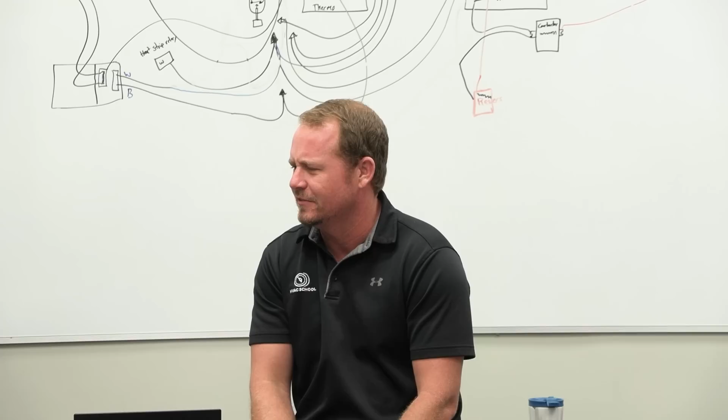Brazing. The number one thing that I see newer techs or newer installers who are really bad at brazing do is they just don't apply enough heat. So they don't get in with enough heat, and so then it takes way too long. So if you imagine the two things that can cause damage to components are brazing too long or burning things that you didn't intend to burn, getting heat places that you didn't intend to get it.

So that's both surfaces that may be behind the brazing area, wires, all that kind of thing, but then also heat that's conducted into valves. And so the way you protect that is, if you're near a surface, you use a heat shield, like a piece of snap lock metal duct, bent out, cut it, keep a piece about that big in your truck. It's just a nice thing to have.

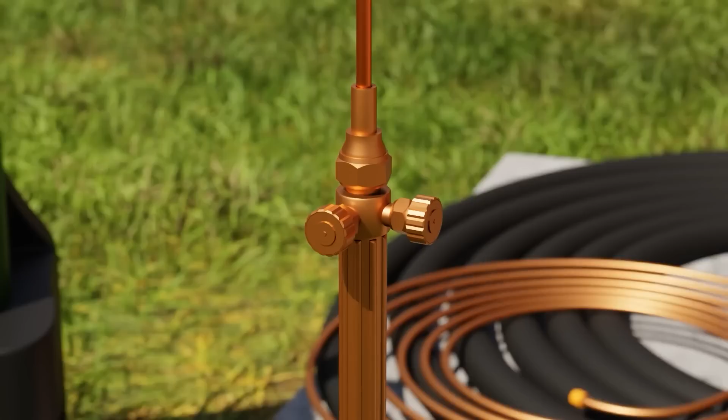Or you can use one of those Solder Weld heat shields, or you can use the big heat shield drop cloths that we have. But you need to have some sort of heat shielding, and that's to protect things that are behind the work area. Anybody here use air-acetylene, the turbo torch? Anybody? Man, I wish we would use that more, because I really think for newer folks who are learning to braze, it's the bee's knees.

And that is a technical term. Literally, the knee of a bee. I don't know why that makes me laugh. Just imagining a bee with knees. Anyway, this is not going well so far.

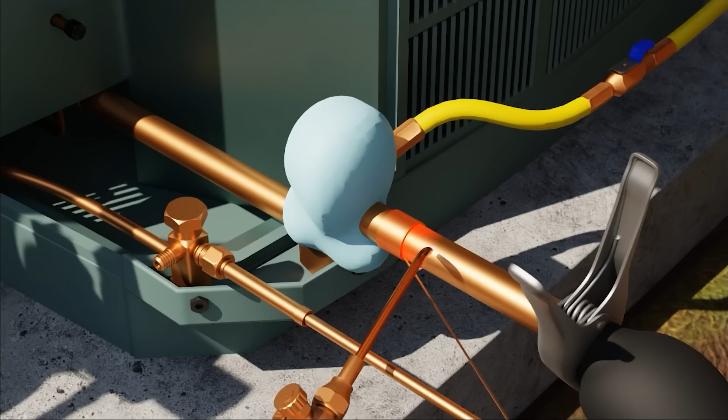So air-acetylene is really nice to learn on, but the downside to air-acetylene is that it does have more of a convective flame, which means that it pushes heat out further. It's not actually as hot at the flame, but it produces more heat behind the flame. So if you do ever use a turbo torch, really nice and easy to use. It's got a nice big flame, so it heats a little bit more evenly.

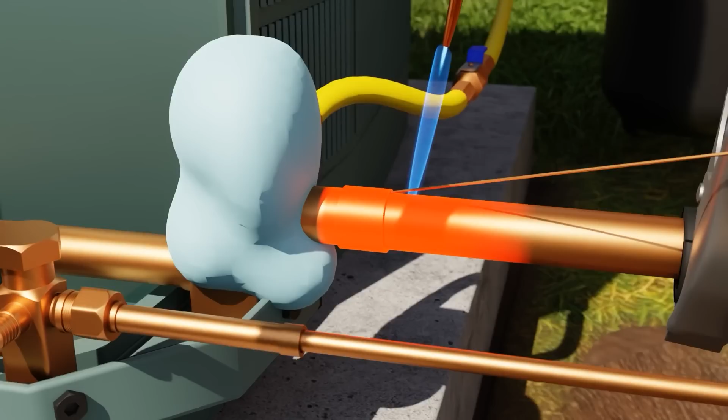Point being that in order to braze it in, you want to get the entire fitting to dark cherry red, not bright red, because then you're about to make a hole in it, but just deep cherry red. You move your heat in and out and all around until you can get most of the fitting deep cherry red, and then you apply your solder, and you do that as quickly as possible. But then you also need to protect the heat sensitive components.

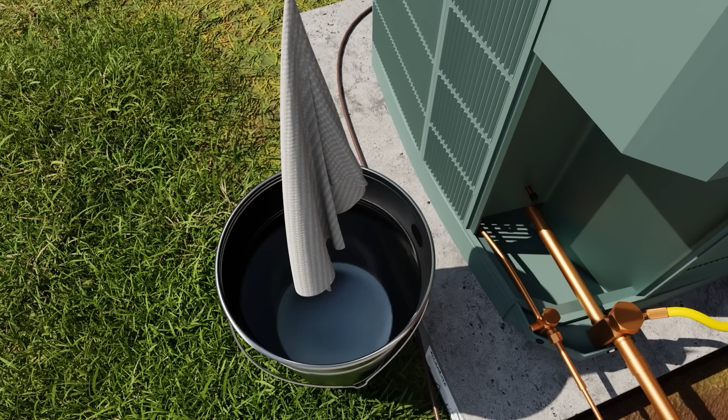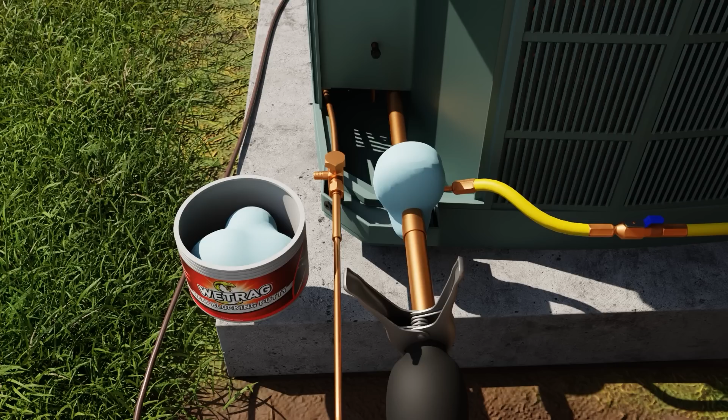You can use a wet rag, or a set of wet rags, or wet toilet paper, or wet paper towel, or whatever you happen to have. Or you can use a product like WetRag or Hot Block from Solder Weld, or whatever else we have here in stock for that. Some people like the heat spray gel. A lot of people will just spray it on the fitting and think that's gonna keep it protected, and it's not. That stuff will disappear in no time.

But if, for example, you have a really tough to protect area that's a little bit away from the work area, you can spray that on it in order to kind of help protect another area that's around where you're working. Does that make sense? Have you all ever seen that? It's in the spray bottle. It's just like a clear gelatinous goo.

I was looking for an opportunity to work that into a sentence today. Gelatinous goo.

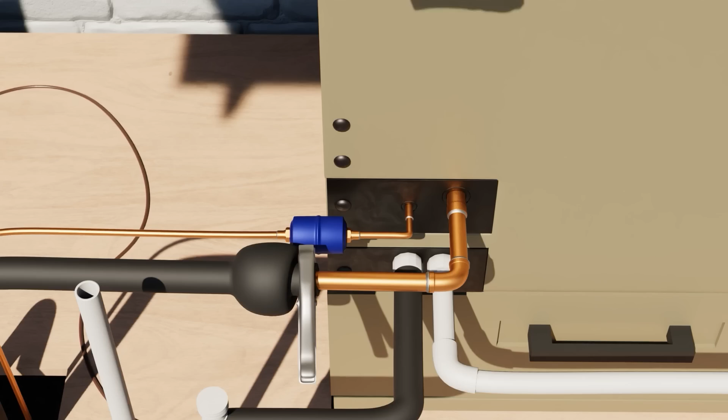Leak detection. Bert's talked a lot about this, but you always follow this process. And I would probably change the order here a little bit. First, visually inspect your connection point. So before you even pressurize with nitrogen, take a mirror or use your cell phone, whatever, and look around the entire connection. Make sure that there aren't any visual gaps and cracks.

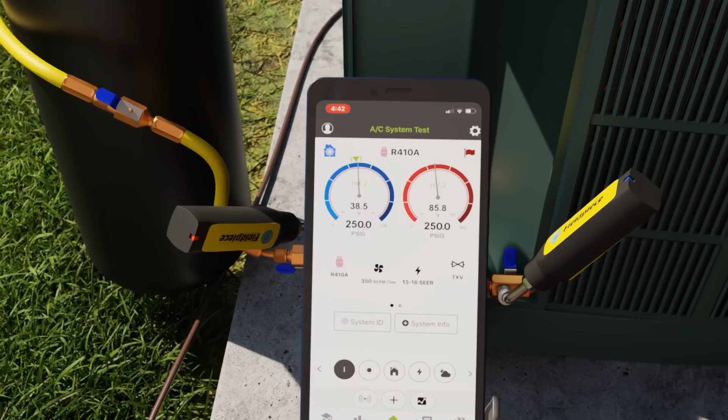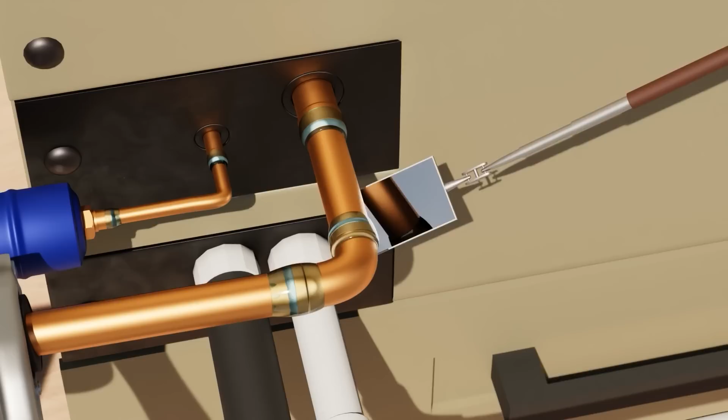Pressurize with nitrogen, and then use soap bubbles, which means that I don't care if you're doing an install, I don't care how confident you are in your work, put soap bubbles on all those joints and let it sit and look for that little microfoam that can build up, because pressure testing with, say, 200 psi of nitrogen, you may not see a pressure drop that's significant enough for you to believe it in that period of time that we typically do a pressure test.

Now, the longer the pressure test, the better, but the worst thing that I see is guys will pressurize up to a certain point, and then they'll forget what they pressurized it to. And then they go back and it's dropped a couple PSI, and they're like, oh, I think that's probably normal. It's probably just equalizing out. I can't tell you how many times I've heard that. I can't tell you how many times I've said stupid stuff like that.

So the point is that when you pressurize to a point with nitrogen, you need to know exactly what that is. And that's where you can use something like the delta P setting if you're using Testo 550s. If you're using wireless probes, a lot of them have that mode where you can do a delta P, which means, delta means what? Anybody know when we say delta, what does that mean? It means change, right, or difference. So delta P means difference in pressure. So you set it into that pressurization mode and then you just see, is it dropping at all? And if it's dropping more than a tenth, that's an issue, right?

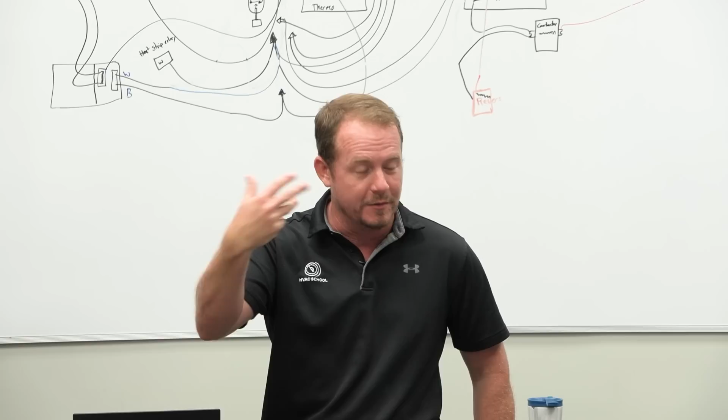So that's a big one, but then use those soap bubbles, overuse soap bubbles. Learn how to apply soap bubbles in a nice stream, so that way it's not creating foam to begin with, so it's nice and just kind of sits there. And then when you come back and you see that little bit of foam building up in an area, then that's an indication that you probably have a leak there. What I would do then is just apply it again, and then actually sit there and watch it and see if you can start to see that foam building.

Does that sound right, Bert? That's great. Leak detection is like your thing.

That's right. Yeah, okay. And then do a standing pressure test for 20 plus minutes. And again, I say 20 plus minutes because I'm being realistic here. This is a realistic process. Don't do less than 20 minutes. I would love to see you do longer. And so that's another reason why getting all your brazing done as quickly as possible is super helpful, because then you can have the longest possible nitrogen test that you can have.

That's another reason why pulling vacuums fast is also handy, because it gives you more time that you can do your standing nitrogen. If you know your vacuum is going to take you 2 hours, then you tend to rush the pressure test. If you know it's going to take you 5 minutes, then you have a little bit more time in your pressure test. So pulling proper vacuums is a big part of that, which brings us to our next point.

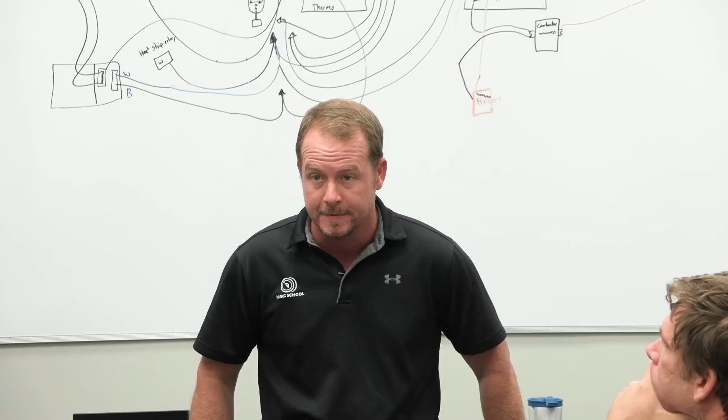Pull the system below 300 microns if you can. And you'll notice I say if you can. On the type of equipment that we work on, you can. There should be no problem pulling below 300 microns in a hot minute.

What's a New York minute? What's a term for a really fast amount of time? Come on, somebody. In a quick second.

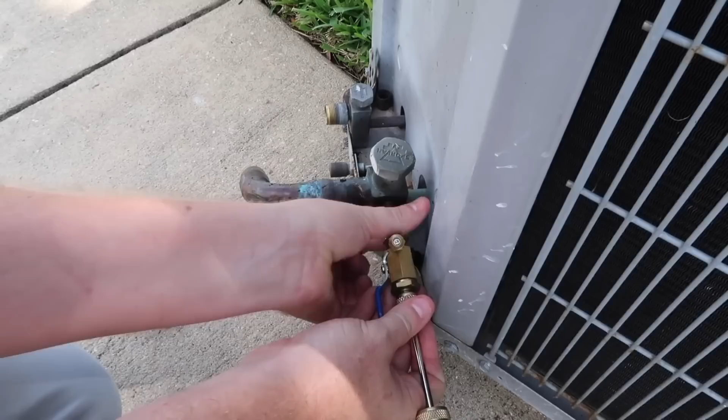Bert got cats yesterday. So pull below 300 microns, and the way you pull below 300 microns is you remove your cores, you use large hoses. We generally, if you're doing an install, use the one hose method. So pretty much everybody here uses the one hose method at this point? Everybody? So you pull below 300 microns, but a really key thing is then you valve off at your core tool or tools, and the system shouldn't decay to 500 plus microns in 10 minutes.

Now again, this is a new install. This is copper and an evaporator coil that's never had oil in it. When you start to work on a system, especially if you're pulling on the compressor, where it has oil in it, and that oil has refrigerant entrained in it, potentially some moisture entrained in it, you're often not going to get these sorts of decay numbers. You're often not going to be able to hit them, and that's okay. So knowing the system is a big part of this. But for what we do, residential changeouts, you should be able to hit that number easily. That's your indication. If you pull below 300, you valve off, and within 10 minutes it's above 500, pull it down again, do it a couple more times.

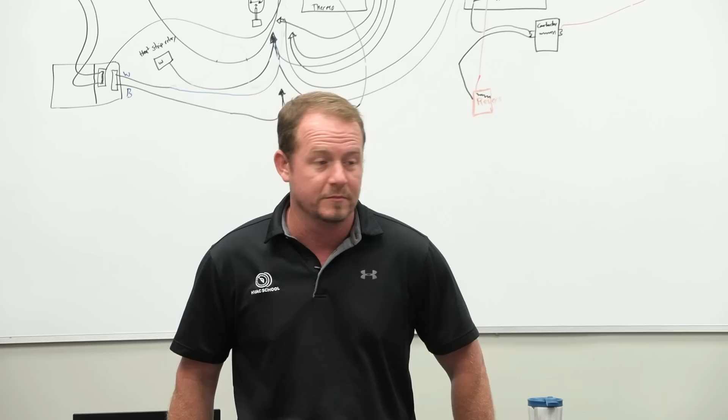You may be just drying it out, but if not, then you probably have a leak. So at that point, you need to start over again, find your leak. Again, leaving leaks nowadays, bad, bad, bad. Among the worst callbacks we can have are leaving refrigerant leaks, because refrigerant's really expensive, and because leaks cause systems to freeze a lot in our market, which then causes damage to brand new equipment, brand new platforms. It's just a bad thing. So we do not want to leave leaks ever, ever, ever.

We want to take every possible precaution, that's the word I was looking for, precaution, in order to make sure that we don't leave leaks. And so the vacuum, though we're not using the vacuum to leak test, we are using it as a final confirmation that we do not have leaks. Are there any questions about these two procedures? Because if there are, get answers to these two procedures, because they're very simple.

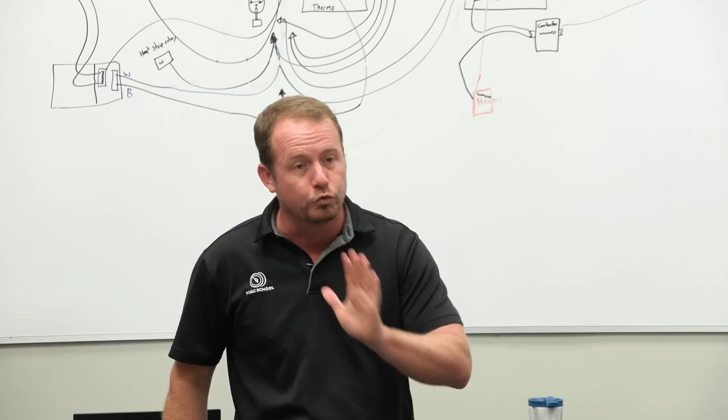I've done videos, in-depth videos on both of these. Bert did a video on leak detection, and then vacuum, we should be crystal clear on how we pull vacuums, because it just makes our life so much easier when you have that procedure right, because then it only takes like 5 to 10 minutes in general.

Why do you prefer the one hose method? I prefer the one hose method because it's a simpler method. So when you only use one hose, there's less to go wrong. You have less seals, you have less core tools, there's just less that can go wrong, and we find that on a change out, because your copper's clean, your evaporator's clean, you still are generally pulling to these levels in under 5 minutes. So there's just no reason.

The other really valuable reason, that I forgot when I first started speaking, was that now your micron gauge is on the far side of the system and it's not being affected by vacuum. So when you see a 300 micron vacuum on the liquid line, on the complete other side, you know that whole system is pulled down. If you're putting your micron gauge near the pump or near where the pump is pulling, that micron gauge is being affected by that pump. And so as soon as you go to do the decay test, you get this big jump.

When you do the one hose method, and you guys have all seen this, many times you valve off and the vacuum actually keeps dropping because it hasn't equalized out on the negative side all the way to the other side, which is kind of nice, right? You have that full confidence. If you're pulling on both sides, you just have to wait for it to equalize, and then you watch it decay, which just takes an additional skill, plus you add some additional variables.

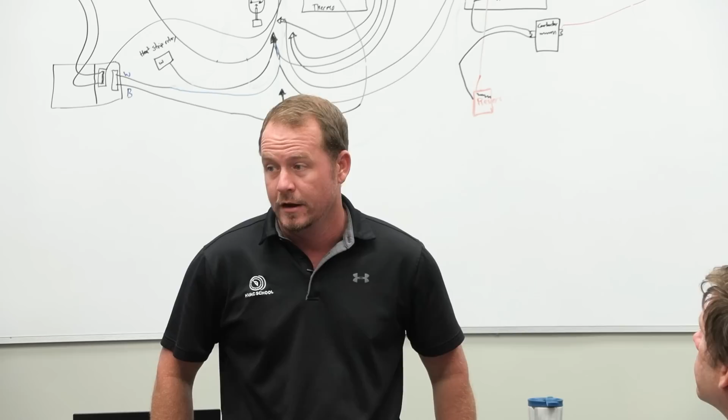Now, if you are pulling on an existing system where you're doing a service repair, and you're pulling on copper that's had refrigerant in it, or a coil that's had refrigerant in it, or a compressor that's had refrigerant in it, then use the two-hose method, because you want every possible advantage you can get, because those vacuums are still much more difficult to pull.

That makes sense. Big difference between a change-out vacuum on new copper and a new evap and a service vacuum on a part of the system that had refrigerant in it previously. Big difference. And your expectations should be different. A service vacuum's just going to take longer. Make sense? Okay.

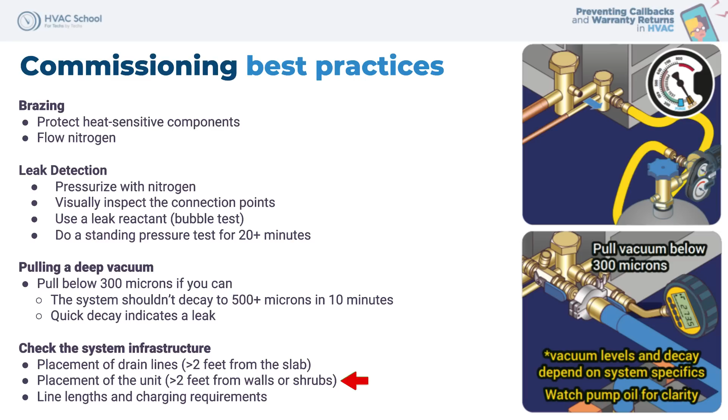Check the system infrastructure. So as part of your commissioning, make sure that you keep your drains 2 feet or more from the slab. Keep the units 2 feet or more from walls or shrubs. And make sure you know your line lengths and your charging requirements associated with line lengths. So you're doing a change out, you need to be thinking about what length is this line set. If it's an existing line set, you can still kind of figure it out. You may be plus or minus 5 or 10 feet, but you're going to be pretty close.

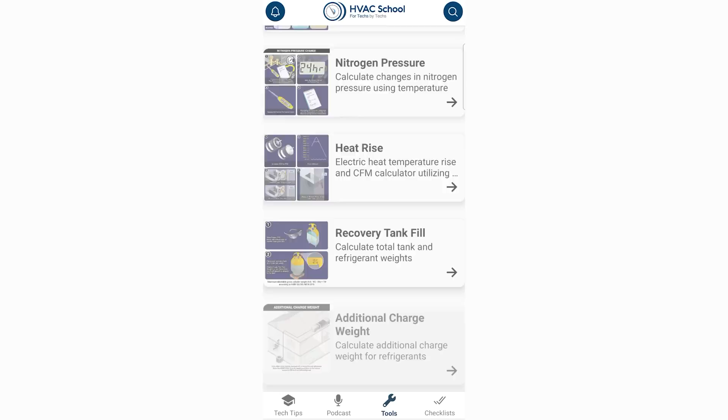And then you use the charging calculator on the HVAC School app. We just simplified it to make it a little easier to calculate how much additional refrigerant you have to add in, if you do have to add in any additional refrigerant; in many cases you don't. Make sense? Any questions about that? All these things will help you prevent callbacks. Ensure you have proper refrigerant charge. I am still a fan of non-invasive testing.

I know that we're not always practicing that, and sometimes it has to do with the fact that we've got newer techs. Sometimes it's difficult to know when you should use non-invasive and when you shouldn't. But as an example, I would much prefer, when we're doing things like cleaning drains and changing capacitors... and I have to be clear here for a second. When I say what I would much prefer, that doesn't mean I want you to leave this room and do things other than exactly what Bert and Sam are telling you.

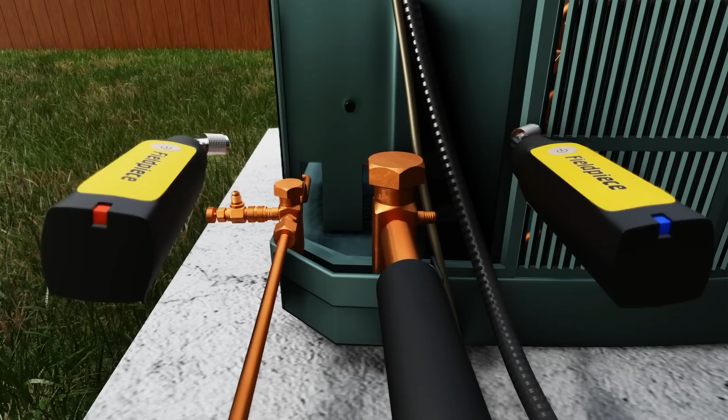I'm just telling you this is the way I would generally like us to operate once we have the skill to do so. I would like us to do non-invasive testing when we're doing those drains and capacitors, which means that we're not hooking up gauges. There's ways of testing the equipment with 99% accuracy using only temperatures without hooking up gauges. We've talked a lot about this in the podcast, we've done videos about it, and it just comes down to really understanding what to expect.

A lot of people will say, oh, you're taking the skill out. No, actually doing a proper non-invasive test is a more skilled test than hooking up gauges. Does that make sense to everybody? So I'm not saying when you set up a new piece of equipment that you don't have to check the charge with gauges and do subcool and superheat.

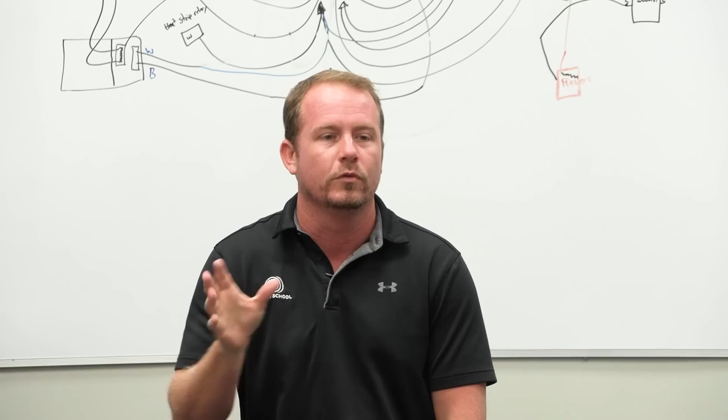Obviously, if you put a new component in the system, change an evaporator coil, change the compressor, change the blower motor, whatever, then yes, go ahead and hook up and do the full retro commissioning, recommissioning. But when you're doing things like a basic repair or even potentially a maintenance, I definitely suggest doing non-invasive testing. Ductless systems are another example. When we do ductless maintenance, some customers want to see you hook up, but in general, just hooking up to the system is another possible thing that can go wrong.

Know what your superheat and subcooling signify about your charge, and I've talked about this a lot. Superheat equals evaporator fill, and a lot of people say, no, it doesn't, it's a quantitative measurement, not a qualitative measurement. Look, what I'm saying is that on the same system, under the same conditions, if you have an evaporator coil that's more full, you're going to have lower superheat, and if it's less full, you're going to have higher superheat.

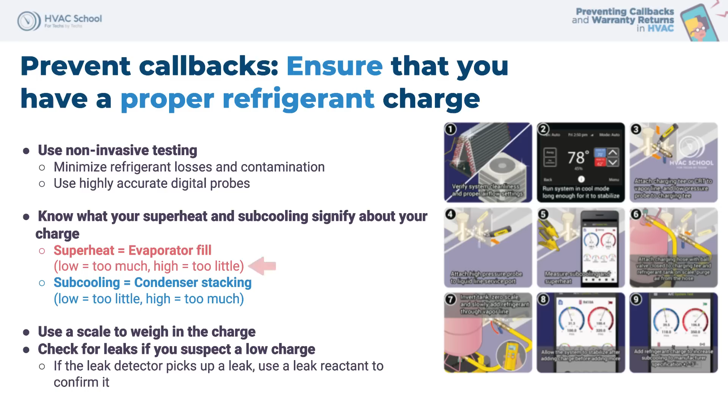And the same thing is true with your condenser. Subcooling equals condenser stacking. How much refrigerant are you stacking in the condenser? Higher subcool means you're stacking more, lower subcool means you're stacking less. Know that's what those numbers are telling you. They're not telling you anything directly about the temperature of the evaporator coil or the condenser. They're just telling you how much refrigerant you're stacking in those. Does that make sense?

Use a scale to weigh in the charge. If any of you are pulling recovery tanks or refrigerant tanks off of your truck without pulling a scale off of your truck, yesterday should be the last day that you ever did that. If you just haven't been in the habit of it, today you get in the habit of it. Well, I don't have a scale. Well, today get a scale. It will save us so much heartache. You won't overcharge systems. You'll charge the right amount of refrigerant.

And I understand why people get lazy. Sometimes I use a scale, but sometimes it's just a little bit, I'll just add a little bit. No, we're done with the days of just adding a little bit and calling it a pound. That's not what we do anymore. Always, always, always use a scale. Did everybody get that? Everybody agree? And whenever I say this, people on YouTube are like, well, of course you should have always been using a scale. You can say should all day long, but I know there's a lot of techs out there who don't use a scale.

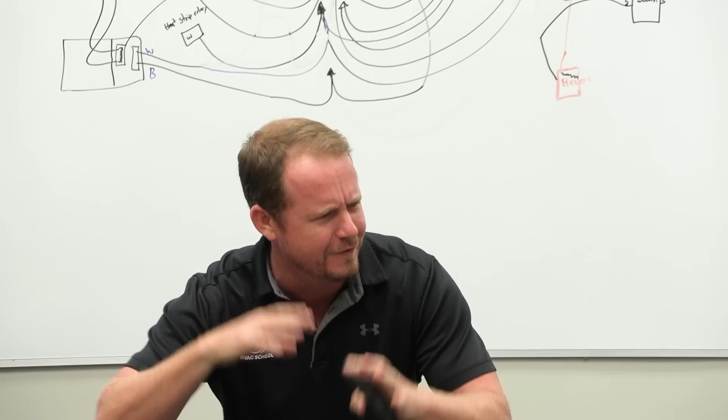And we just need to be using a scale. It's funny because Interplay has this whole thing about how to charge by subcooling, and it's an interactive 3D virtual reality experience. And I'm not dogging on Interplay, but okay, maybe I am a little bit. Not really. It shows you inverting the refrigerant tank and all this, and guess what's not there while they're charging? A scale, right?

So it just proves that the only time a lot of technicians are pulling out the scale is when they know the camera's there. Oh, oops, that's right, I'm supposed to be using a scale. We've got to translate that into the world of we always just use a scale, because it's no longer one of these industry best practices that we all ignore. As far as running a good business, we just have to do it. Refrigerant's costly, so we can't make mistakes with that.

And check for leaks if you suspect a low charge. So don't just add a little bit of charge to it. In many cases, it's going to be best to quote the leak detection before you even quote to add the refrigerant. And I know that's backwards on a lot of our practices. Again, if the system is flat, obviously, you can't do a leak detection. But if it's just a little low, it's best to get the where's-it-leaking question out of the way before you even start adding refrigerant.

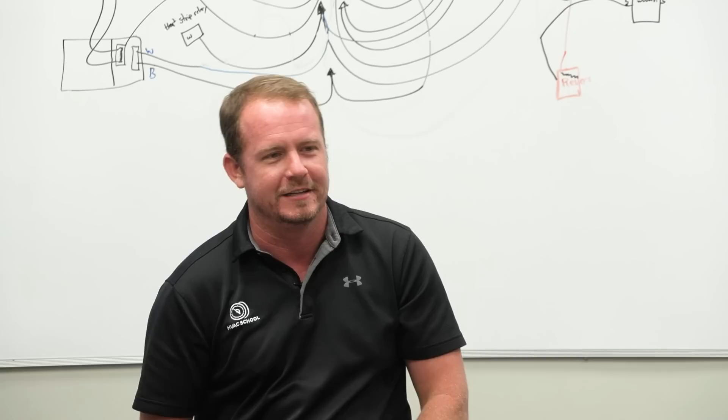Because it gets you disciplined to not have that as a back end, oh, hey, you might want to do a leak detection, right? That's not how we talk about leak detection. How do we talk about leak detection when a system's low on refrigerant to a client? We need to do a leak detection to find where the refrigerant is leaking, because it went somewhere. No more of the, well, you could do it. We don't tell a customer, your capacitor is blown, you could replace it if you want, or you could just let it go and see what happens, right?

No, we do not. That's an old school thing from when refrigerant was cheap and clients were easier to deal with. Nowadays, clients expect us to basically own their air conditioner. They don't want this problem to happen again. It doesn't matter what conversation we have with them about things likely to cause another failure. If it fails again, they're calling back and blaming you. Leak detection is no longer something we give them as an option. And not finding the leak is also not an option.

Because if you didn't find a leak, there isn't a leak, right? That's the way you've got to think about it. Either there is a leak and you're going to find it, or there is not a leak and you were wrong about it being low. Which one is it? And no, it isn't that the neighbor kid came and huffed some refrigerant, okay? That's the most ridiculous one I've heard. Oh, I think someone's stealing refrigerant out of this unit. No, they're not. Stop it.

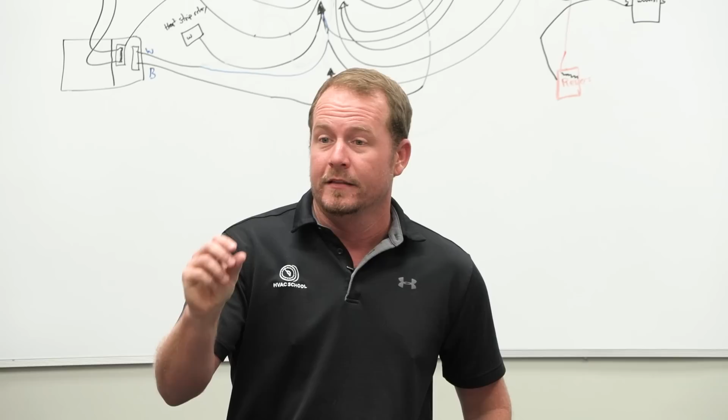Now, it is possible that the cap didn't have a seal in it, and when you uncovered it, you actually covered up the leak with your hose, so pay attention when you walk up to it. If you pull that cap off and it doesn't have a seal and you see a little bit of oil, get your soap bubbles out right now and check whether it's leaking, or use your leak detector. The only downside of soap bubbles is you might get soap into the system, which probably isn't the best thing.

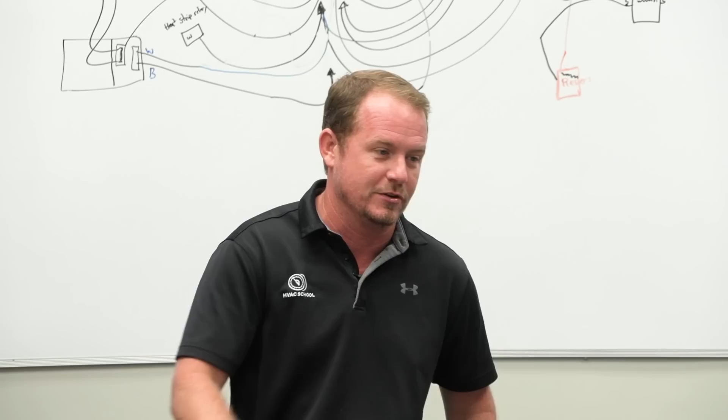But just get your head straight about these practices. Don't give yourself any excuses. I know why it happens, especially when it's busy. I get it. I feel that. But you've got to just be like, nope, this is what we do. And that will solve so much of this. And on the back end, you'll be so glad because you won't get those calls.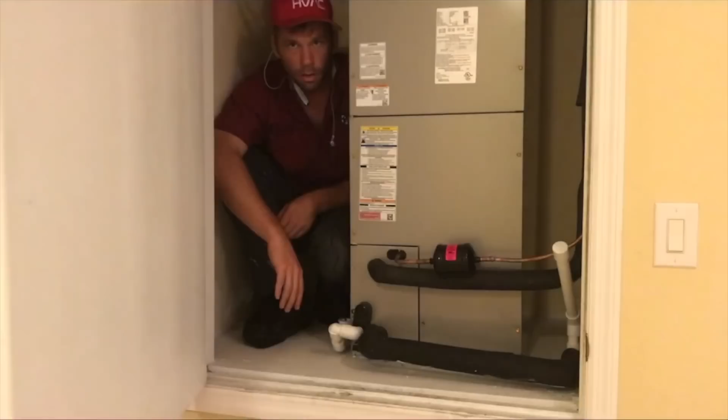All right, final couple things. Drains, drains, drains. Drains are the number one reason we have callbacks, the number one reason we have upset customers, the number one reason for all the pain and suffering and sorrow in our lives other than leaks. So don't just make sure we have clean drains. Make sure you have properly pitched drains. If a drain backs up multiple times, don't just clean it again. Slow down and be more thorough. What is going on specific to this application?

And just take ownership of it. Don't be like, well, hey, I can't see it, so I don't know what's going on. Like, now we got to figure it out. We got to come up with a plan B. We got to do something.

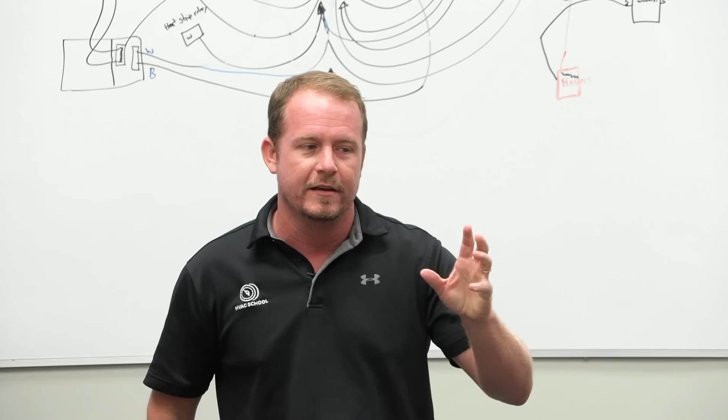There is a product, especially if you get systems that get that. Do we get a lot of the elephant snot still? We're seeing that. And again, there's a difference between elephant snot that's like normal and elephant snot that's like every 2 months this thing is getting completely gummed up. And it's usually with all aluminum evaporator coils, okay? When we get that, there is a product, and we need to get it in stock, and I forget, this is really bad marketing, I don't know what it's called.

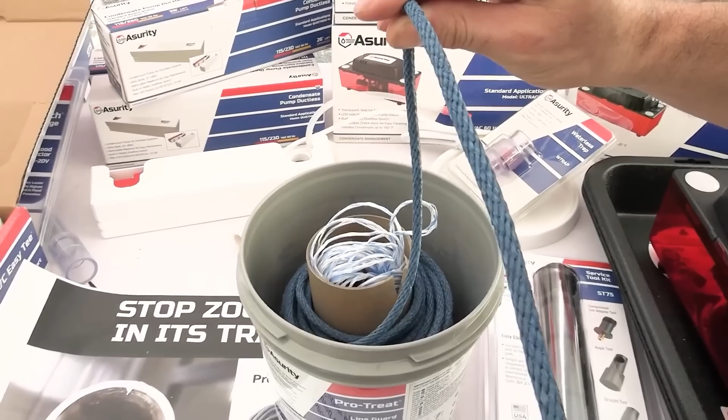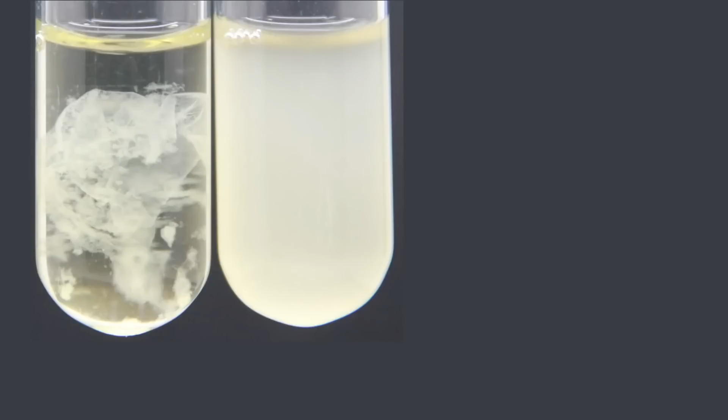Diversitech makes it, and it's basically a rope that you snake through the drain, and it has copper and silver embedded in that rope. And it's been tested and shown to eliminate the elephant snot problem, because elephant snot actually comes from outside. It comes from the ground, and it gets in the drain out of the ground. It's actually a bacteria, a special type of bacteria, comes in the drain, and so if you can prevent it from building up in that trap, then it doesn't back all the way up in.

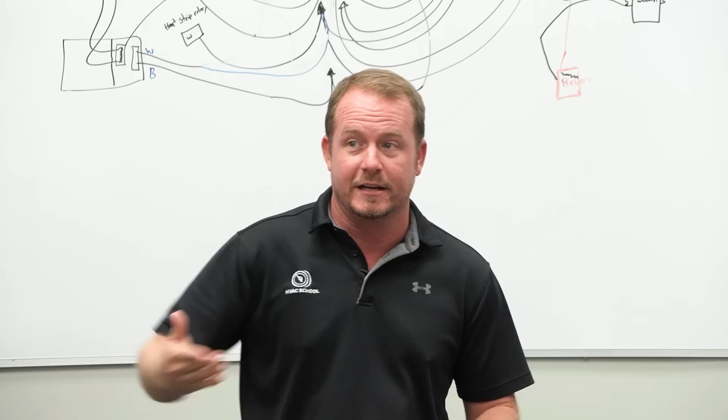So even when you see it in the drain pan, it's actually sourcing from outside and working its way in, not starting from inside and working its way out. At least that's mostly what the testing is showing on that. So that is a product that I want to have kind of be a common add-on when you've got clients who have problem drains. I want us to just start quoting it.

And it's pretty easy. You just suck a little mouse through. So it's a little foam piece that gets a string, and then you use the string to pull the rope through. And then at the end, you just take it and kind of flip it over the drain and then just binder clip it so that way it doesn't come off.

They don't advertise it this way, but the original inventor says that it's lifetime because it's not like an antimicrobial fluid. It's actually using silver and copper within the rope, which I love because we know that that does work to deal with bacteria, because that's the reason why it's happening in the first place.

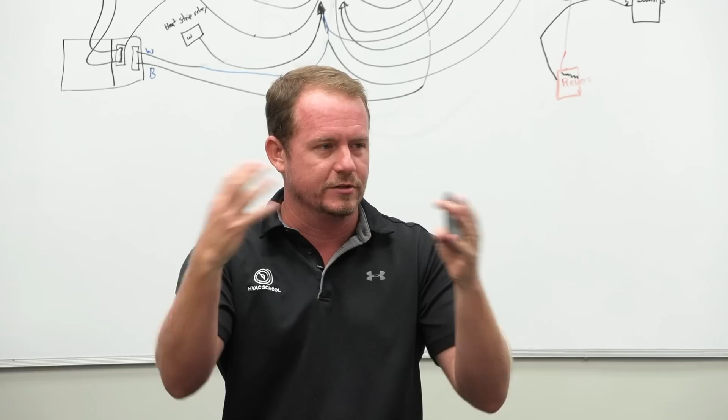In the past, when we had copper in our coils, those copper oxides and those copper ions were making it down the drain and were preventing that from building up. And the reason why it is happening now is because we have all aluminum, and so we no longer have that copper to help combat it. So copper was what prevented it before. Copper's the solution now. Make sense?

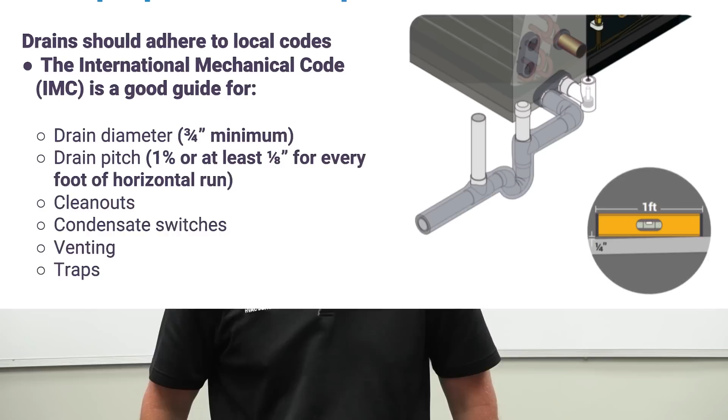In the meantime, if you don't have that, you can just take some little pieces of copper, like take some 3/8 copper, pound it flat, and lay it in the drain pan. And that does seem to help a little bit with that problem. Make sure that we have proper pitch, at least 1% or at least 1/8 inch for every foot of horizontal run. I say 1/4 inch. So that means every foot that it goes sideways, it needs to go 1/4 inch down.

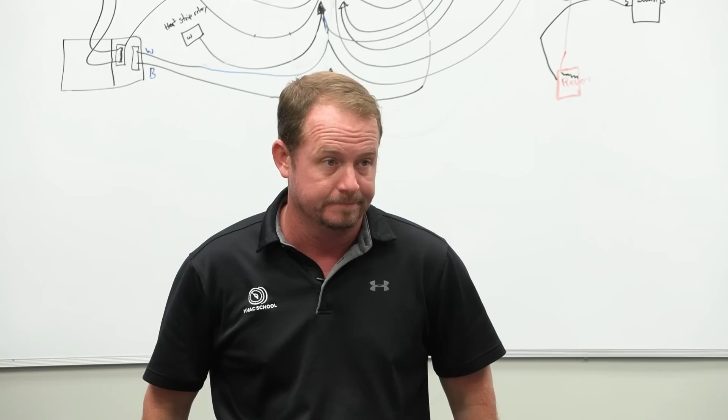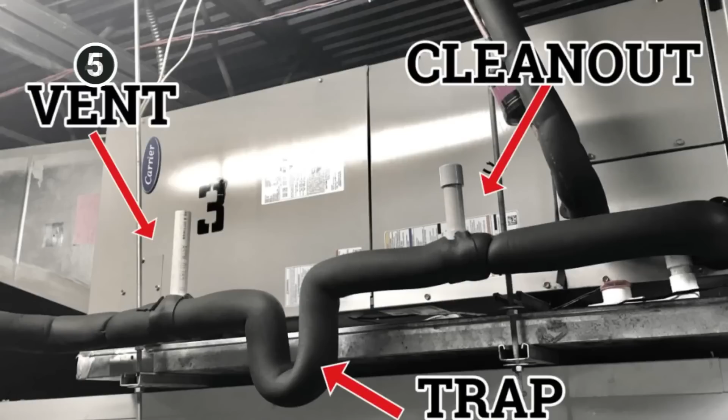We can't have double trap, so we can't have it going up and down more than once, unless we have a vent, which this is showing a vent. We've got our clean out and then a vent. Obviously, for the types of systems we do, most often we don't do this. But if you ever do have a system that's going into a common drain, like in an apartment complex or multifamily, this is how it has to look.

You have your clean out, then you have your trap, then you have your vent, and the vent stays open and the vent is taller than the drain pan. So in case it does back up, it backs up in the drain pan and trips the float, it doesn't start squirting water out of the vent and causing mass destruction and sadness and dogs and cats living together.

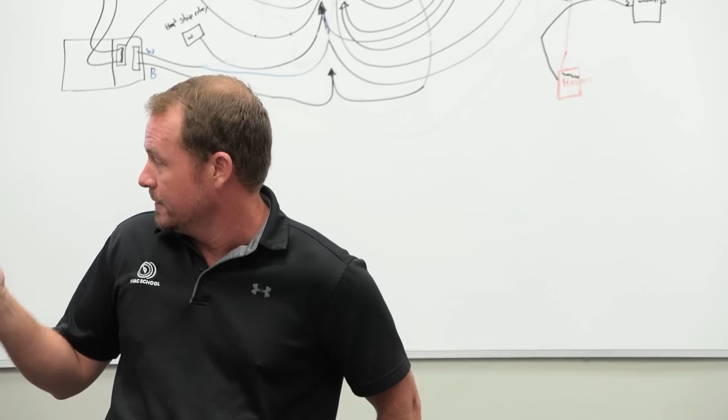And then just make sure you clean until it's clean. We talk about this all the time. We use shop vacs. It isn't necessarily the best way of cleaning a drain, but it is a way. What's better if you have a really bad drain line, drain pan, is to put a cleaner in and just let it sit. Now, we've talked a lot about drain solve, and I do not love how toxic that chemical is.

I'm not a fan of that chemical. Sam and I have a little bit of a dispute about this, but the point is that if you are going to use Drain Solve, if you're going to have it in your truck, if you're ever going to use it, you have to treat it like what it is, which is a toxic chemical that will eat your eyeballs out of your face. Okay, so I am not going to be the guy who ever downplays this and then is responsible for your blindness, with your widow and poor children who can no longer be supported by you because you were stupid and didn't wear safety glasses and weren't careful with it.

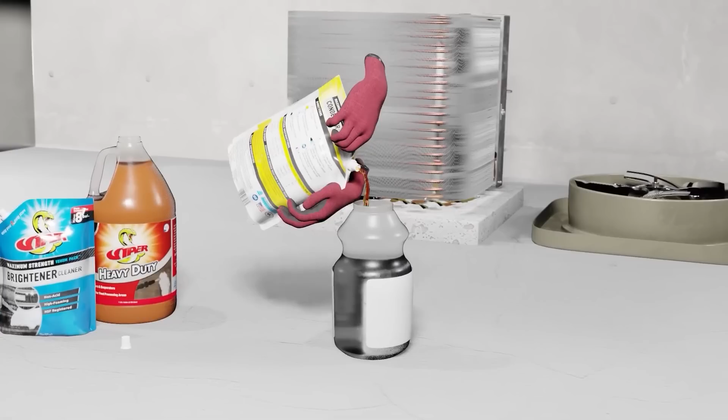And it melted a hole in the bottom of your truck and destroyed everything. I'm a little passionate about this, okay? So just be really, really careful if you're going to use Drain Solve. Otherwise, use something like Refrigeration Technologies Viper Condenser Cleaner. You can even use the concentrate and just put a little of that in the drain line and the drain pan and let it sit 10, 15 minutes, whatever, and then flush it out, especially once you've gotten the clog already cleared. So that way it's cleared, but maybe the drain still has some buildup in it.

Once you use a cleaner, though, run a lot of water through it. Suck a lot of water through, because it's possible you may have some hangers-on in there that can then clog it up again. So you've got to make sure that you clean it until it's clean. Clean it until the drain pan looks clean. Clean it until the channels under the coil are clean. Just be really thorough about drain cleaning. Be really thorough about drain strapping. Be really thorough about making sure you have proper pitch. That make sense? Don't be dismissive about drains.

Don't just pitch up the float switch because, oh, well, hey, it keeps tripping and I'm pretty sure if it's level, that's the problem, so we're going to just pitch it up a little bit. If it doesn't seem right, it's not right. Be thorough about drains. Be creative about drains. Be thoughtful about drains. Think in your head, where's this drain routed that could be causing this problem? Is there any possible way it could be going up and down more than once?

It's not the worst thing in the world, especially since the majority of our installs are still garage. We've got that platform. If you've got to cut the drywall out nice and square and then just put the piece of drywall back in and put a vent over it, that's not the worst thing in the world. Most clients, that's not going to bother them. And you're creating an access point in order to get in underneath that platform. If you've got to do that in order to get down there and see what's going on, then that's what we've got to do. Again, we've got to talk to the client about it, make sure they're okay with it first. But it's not that big of a deal.